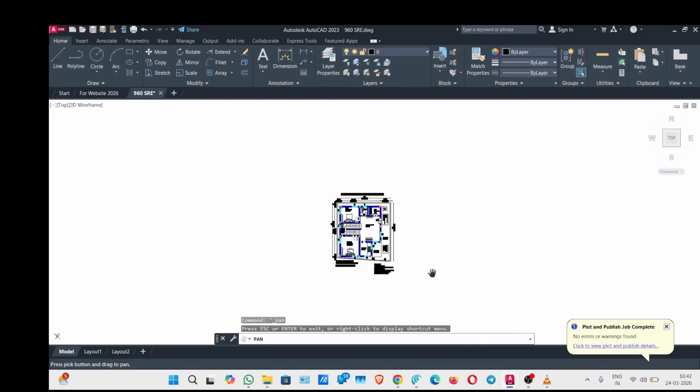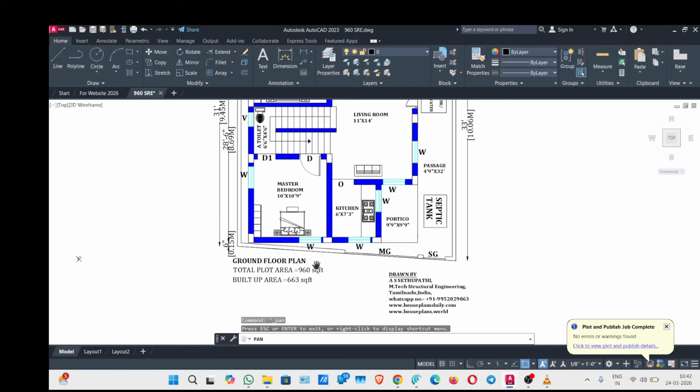Vanakkam and Namaste. In this video, I'm going to explain a compact 2 BHK house plan designed as per Vastu for the south face road and east facing house on 30 by 33. The plot area is 960 square feet and the built-up area is 663 square feet. So this is suitable for small plots and budget construction.

I will walk you through each room one by one on the screen and share important Vastu tips for door position, room locations, toilet, and puja room, so you can avoid common mistakes in your home design.

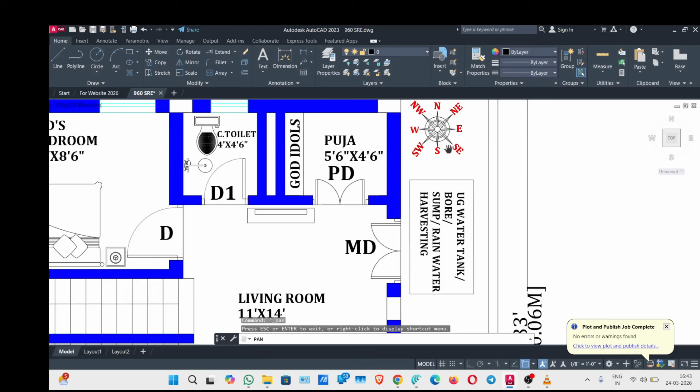First, let me explain the orientation. Here, the road is on the south side, and the main facing of the house is towards the east side. East facing houses are considered very good in Vastu because they receive more sunlight and positive energy.

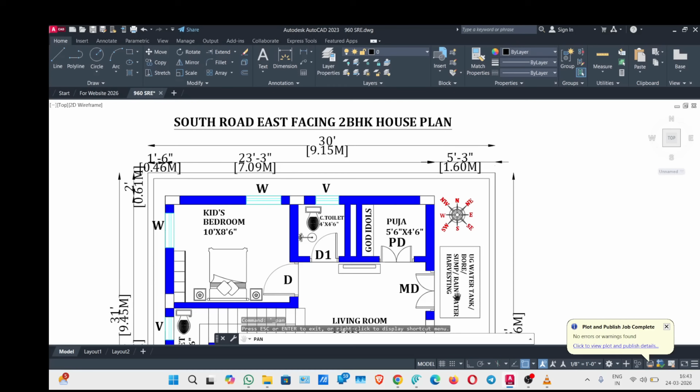On the screen, you can see the north direction marked on the top right of the compass. Right now, my cursor is on the east side. This is the front side of the house, and the west side is on the left. Remember, in Vastu, we mainly care about where we place the main door, master bedroom, kitchen, toilets, and puja room with respect to these directions.

Now let us start from the entrance. On the east side, we have a 9 feet 9 inch by 9 feet 9 inch portico. This is like a small sit-out or parking area in front. For an east facing house, having an open or semi-open front is very good because it allows sunlight and fresh air into the house.

The main door is placed slightly towards the northeast side of the east wall, which is considered very auspicious for the entrance. Try to keep the main door in the northeast or exact east rather than southeast corner to attract more positive energy, good health, and financial growth. Also, make sure the main door opens inwards in a clockwise direction and keep this area well lit and clutter free.

From the portico, we enter the 11 by 14 feet living room. You can see it is placed towards the center of the east of the house, which is ideal because it becomes a welcoming and bright space. In Vastu, it is recommended to keep heavy furniture like sofa towards the west or south wall and leave the northeast corner as light and open as possible. So you can place your TV unit on the south wall and keep the north side or east side more open.

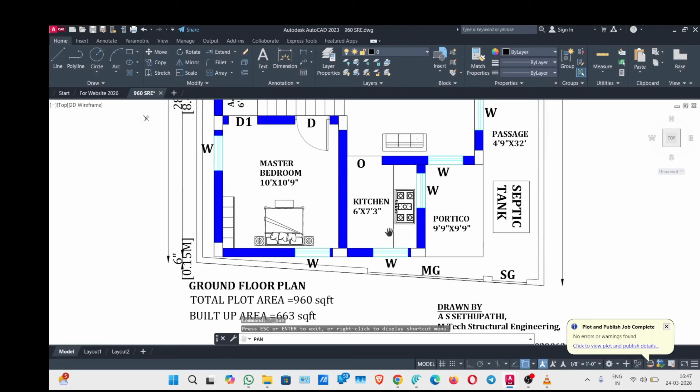Next, we will see the bedrooms. This is a 2 BHK with the master bedroom and a kids bedroom. The master bedroom is 10 by 10 feet 9 inches and is located in the southwest part of the house. According to Vastu, the southwest is the ideal zone for the master bedroom because it gives stability, control, and long-term success for the head of the family.

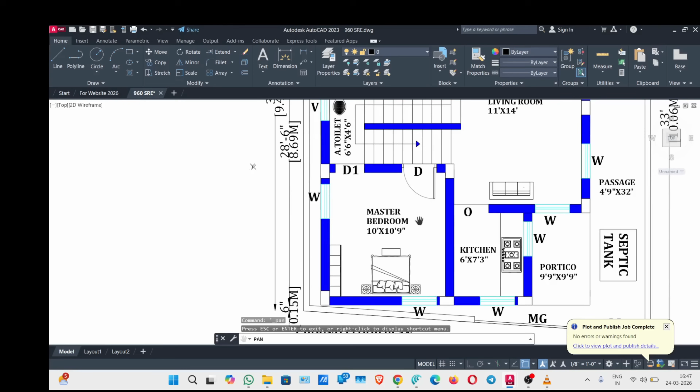In this bedroom, you can place the bed so the head is towards the south or west, and the person sleeps with feet towards north or east. Avoid keeping the bed exactly in the center of the room or under a heavy beam. Wardrobes can be placed along the south or west walls. And if you want a small study table, it is better on the east or north side, so the person faces east or north while studying, which is good.

Now comes the kids bedroom on the northwest side, with a size of 10 feet by 8 feet 6 inches. Northwest is generally good for children and guests because it encourages movement and growth. Here also try to keep the bed with head towards the south or east. The study table can be placed so that the child faces east or north while studying. Avoid heavy storage in the northeast corner of the room. Keep the area light to promote concentration and good health.

Now let us look at the toilets and staircase. There are two toilets in this plan. One is attached near the kids bedroom, marked as C toilet.

That is common toilet, 4 by 4 feet 6 inches. And one for master bedroom - another attached toilet for the master bedroom under the staircase, 6 feet 6 inches by 4 feet 6 inches.

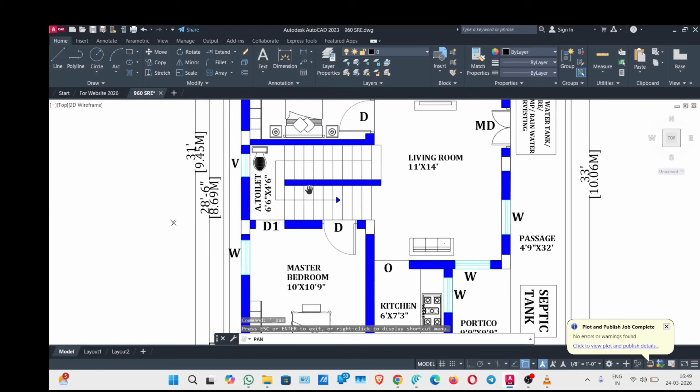In Vastu, toilets are a sensitive area because they can create negative energy if placed wrongly. It is generally recommended to place toilets in the west, northwest, or southeast zones, and avoid the northeast and center of the house. In this plan, the toilets are kept towards the west central zone, away from the northeast and away from the main entrance. This is a practical and acceptable solution for a compact plan.

Inside the toilet, try to keep the WC on west, facing north or south. Avoid facing east or west. Also make sure there is proper ventilation and an exhaust fan to remove negative energy.

The staircase is placed near the central west side of the plan. For internal staircase, southwest side is preferable. Try to avoid staircases in the northeast corner. Here the location is fine for a small house, and the steps should preferably go in a clockwise direction while going up.

One special feature of this plan is the dedicated puja room. You can see the puja room is 5 feet 6 inches by 4 feet 6 inches, placed close to the northeast zone of the house with a separate god idols platform. Northeast is considered the most sacred and peaceful direction in Vastu.

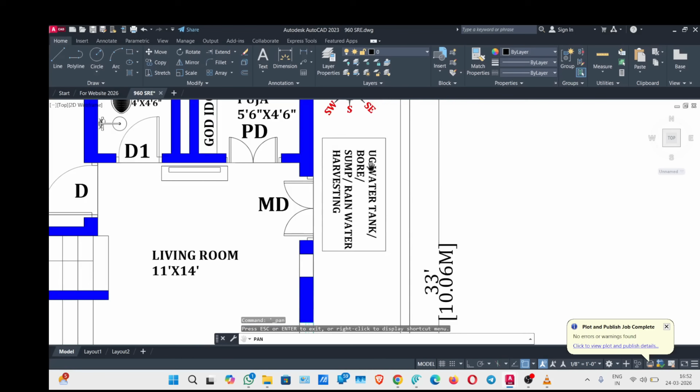Now, if you look at the outside area on the east side passage, we have a septic tank marked, and towards the northeast corner near the boundary there is a reserved underground water tank, borewell, and rainwater harvesting on the northeast side.

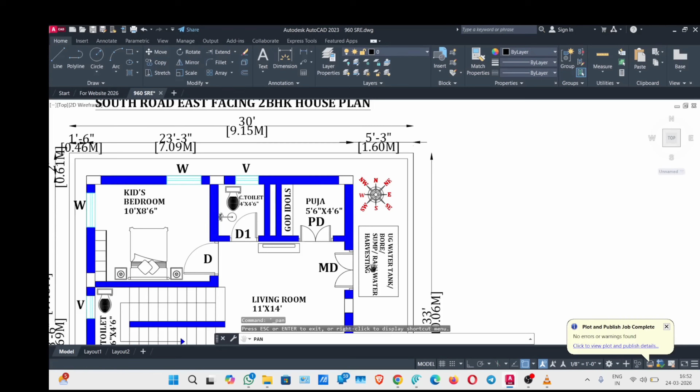In Vastu, northeast is the best location for water sources like borewell, sump, and underground water tank, because this direction represents the water element and brings prosperity when activated properly. So keeping the sump and rainwater harvesting pit here is a very good point in this plan.

For the septic tank, northwest of north or southeast of east is preferable. In this plan, we kept it in the southeast of east, but try to keep some separation between the septic tank and the exact northeast corner.

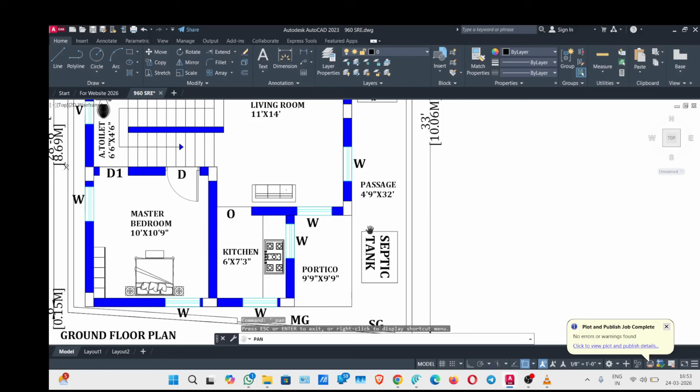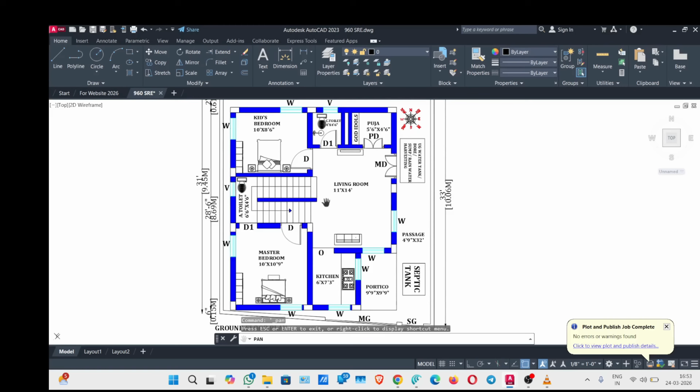Let me quickly summarize the main Vastu points in this 2 BHK plan. East facing main door placed towards the northeast side, which is very auspicious. Master bedroom in the southwest zone for stability and authority. Kitchen in the southeast, the ideal fire corner.

Puja room and underground water tank near the northeast, the most sacred and special direction. Toilets kept away from the northeast and center of the house. Good open space in front and a clear passage on the east side for light and ventilation.

If you are planning to build on a similar plot size, you can use this plan as a reference and adjust room sizes as per your requirement, but try to maintain these Vastu principles. A properly planned Vastu-compliant house not only feels comfortable but also supports health, peace of mind, and financial growth for the family.